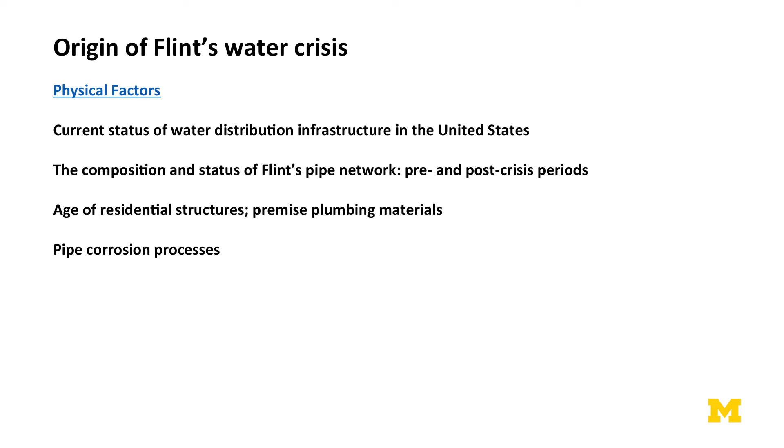Now, on what basis do these low grades get awarded? It has to do primarily with the age of the infrastructure, which is outmoded. Most of the pipes in this country were laid during the 1880s, 1920s, or the 1950s. Those laid in the 1920s, lifespan is up very soon.

Now, Flint is a city that grew rapidly between 1920 and 1950, reaching a population of twice what it is today in the mid-1950s, early 1960s. It's since gone down by half. I mean, we've gone from 196,000 people in Flint to only 102,000 today in less than 35 years.

The other thing that the American Society of Civil Engineers bases their grading scale on is what they call the funding gap. What needs to be funded versus what is actually funded in terms of addressing the problems. And this funding gap is getting bigger every year, where we need to address more and more infrastructure, but we're spending less and less on it. So that's a big problem.

Flint's pipes, like most of those in the northern states and the eastern United States, are made out of cast iron. They were laid in the 1920s. Some of them may have been joined with what are called bell and spigot joints, and bell and spigot joints were sometimes joined with poured lead. So there might be some lead still present in the main system. Those are the pipes that run under the streets.

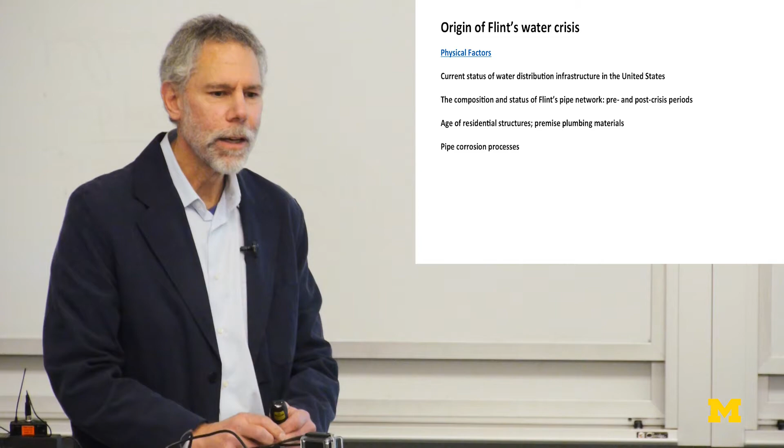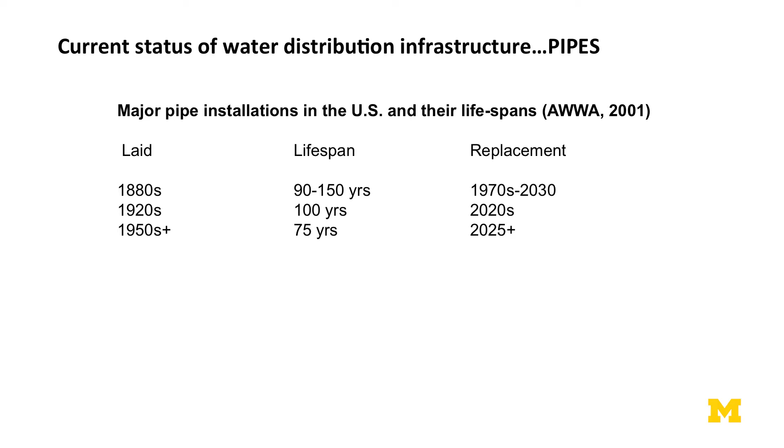So this shows the major periods of pipe installations in the United States, 1880s, 1920s, and 1950s. Another change occurred in 1970 when we switched from cast iron to ductile iron. Ductile iron has a little bit different arrangement of the graphite in the metal. It's more spheroidal, has a little better longevity. The cast iron pipes, the graphite component is a little more flaky. It's not quite as strong.

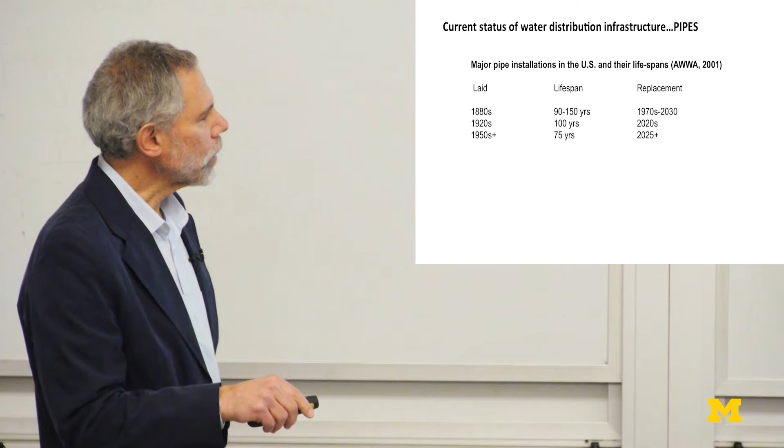But notice that the replacement period for the 1920s pipes is 2020, essentially. And that's why we're starting to see widespread main breaks in Flint. Just last Tuesday, we had a major main break that took out the whole north side of the city. And we had a boil water alert. That can cause big problems because you have to shut the water off, and then stagnant water in the pipes can leach more lead and also becomes conduits for inflows of bacteria.

This chart just shows what's in Flint. We have 600 miles of main pipes that are primarily cast iron. Some of the older pipes built in the 1890s were actually made out of wood, and a few of those are actually still in there. Where, we don't know. But a lot of older cities have wood as conduits for water. 80 years old is about the average age of the mains.

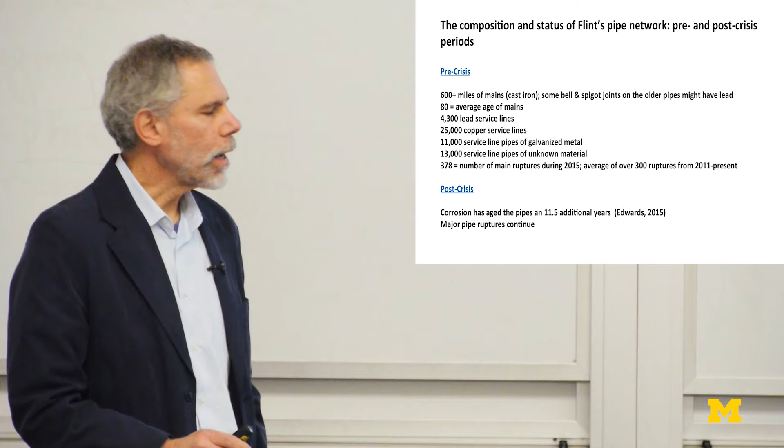We have 25,000 copper service lines, 11,000 of galvanized, and then we have 13,000 of unknown. And that was missing data. And that's a result of those cards not having adequate information that got transferred to the parcel maps. We had 378 main ruptures during 2015 and an average of over 300 from 2011 to the present. Right now we're looking into the spatial correlation between main ruptures and the outbreak of Legionella that occurred in the city, in the county, that has killed 10 people over the last year and a half.

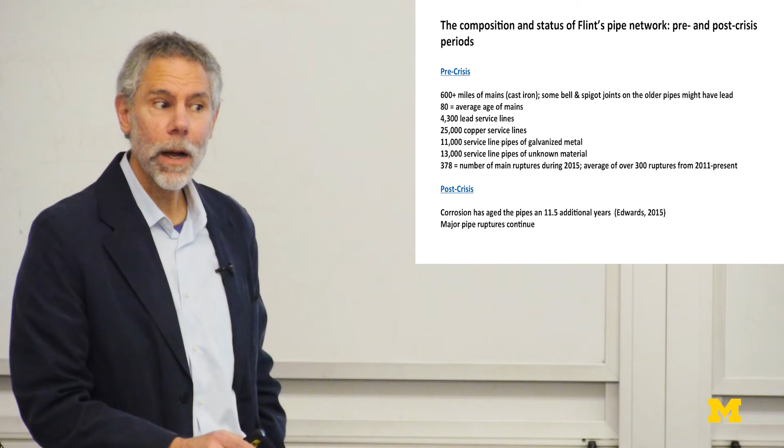Professor Marc Edwards of Virginia Tech did a simulation in the laboratory, and he looked at how much aging had occurred as a result of the aggressive water that Flint had used for 19 months when it switched off of the Detroit water system and began drawing water from the Flint River. And he estimated that the pipes aged an additional 11 and a half years. This is already a pipe network that's on the edge of its useful lifespan. And major pipe ruptures are continuing.

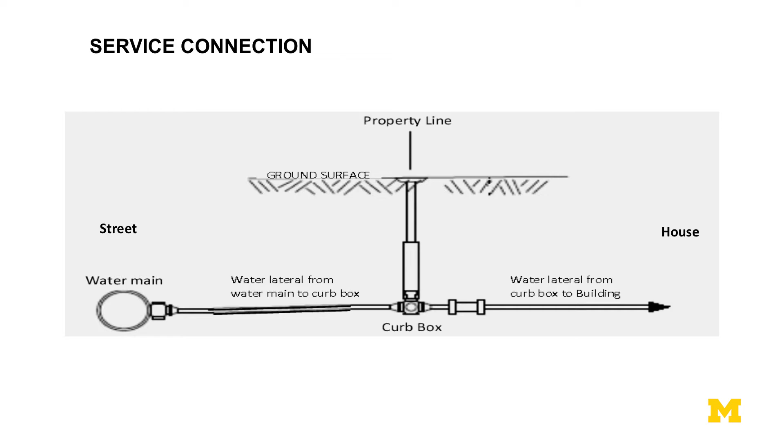So this is the service connection line I've been talking about. So you have the street here, here's your water main. It could be a 24-inch, 36-inch cast iron pipe. This right here is called the corporation valve. This goes right into the curb box. Here's your curb stop right here, where only the wrench from the utility can open that and close it. And then you have the service line leading into the house right there.

So quite often what would happen is this might be all lead, the city would replace this portion of the pipe. Homeowner could not afford to replace this portion, and then you'd have a copper to lead connection. And we had several thousand of those that we found in the data.

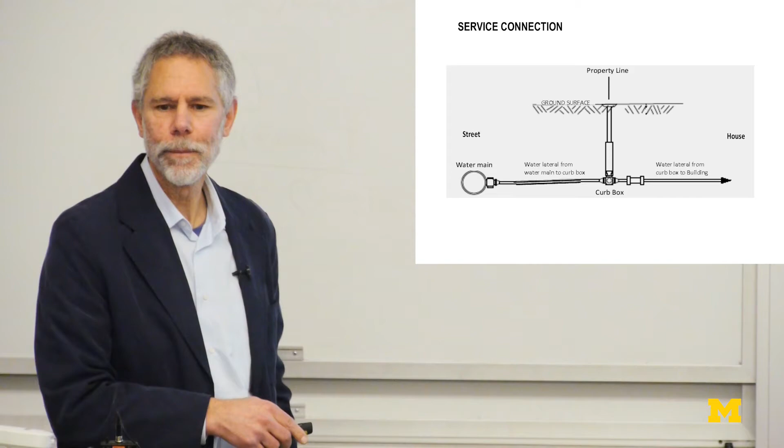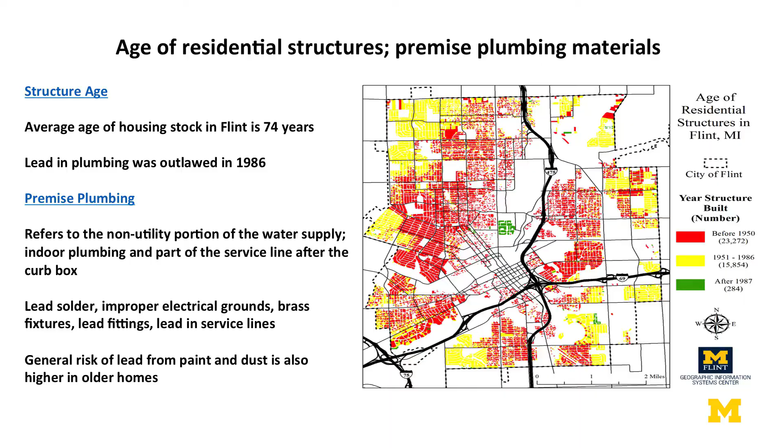Age is a big determinant of the potential for there being lead in a structure, not to mention other presence of lead within the paint, and even improper grounding of electrical devices to water lines can cause corrosion. I know I've been in people's homes where their electrical system has been grounded to their well. And that's not good, because wells also have lead components.

If your well was built before 1991, there's a good chance that your packer element, which is the element just above your water intake, could be made of lead. Michigan statute in 1991 outlawed the use of lead in well materials, but brass also has lead in it, up to 8%. So brass fixtures, faucets, fittings, that could have lead.

In 2011, NSF Rule 61 lowered the amount of lead which could be present in brass to 0.25% on a weighted average of all the fixtures in the house. But the law didn't go into effect until 2014. A lot of people have homes with brass fixtures that are older than 2011 or 2014.

So here's just a breakdown of what I've talked about already. Flint's average age of home is 74 years. These old homes are shown in red on the map here. And look at this concentric ring here that we have, with the older homes located near downtown and around it in a donut. And then on the outlying areas, you have the newer homes built between 1951 and 1986.

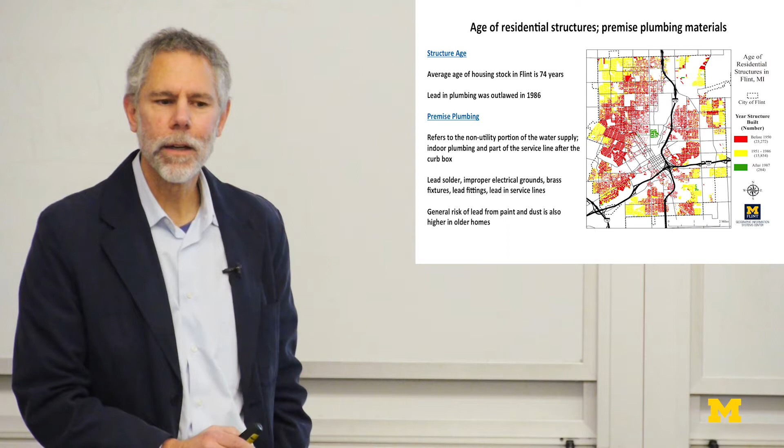And then only a few places in Flint, right here and right here, have new construction, relatively new, built after 1987. So it's quite possible that almost every home in Flint might have some type of lead component that water passes over before it reaches people for consumption.

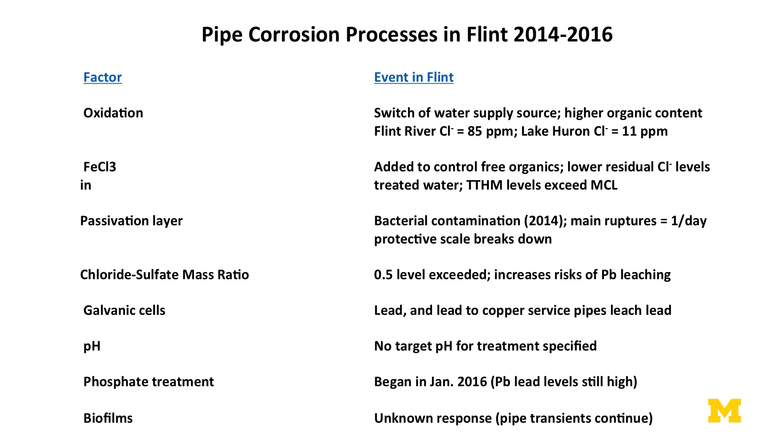So here's just a quick breakdown of what we think happened. When the water supply was switched, the water had a higher organic content. I know when I took water treatment here from Professor Glysson in the Civil Engineering Department, he mentioned that Ann Arbor used what was called a split treatment. They took water from Barton Pond, and then to cool it down, they used groundwater from the south side of the city near the airport, because treating water that's warm is problematic. So they needed to cool it off a little bit, and they got that through groundwater.

Groundwater is typically at about 55 degrees Fahrenheit, which is the average temperature of the earth. So it's a little cooler than river water. River water, though, has a lot of organic material in it. There's this crud that falls into river water. Pine needles, leaves, animal feces, you name it. You have to account for that in your treatment process. There's also a lot of salt that runs off into surface water bodies if they're inland, as opposed to the Great Lakes. So there's going to be high chloride contents.

So that water may be naturally more aggressive and create a lot more corrosive potential once it goes through the pipes. The Flint River had an average chloride content of 85 parts per million, whereas Lake Huron was much less at only 11 parts per million. So by switching over, not only did Flint take on a more aggressive water with chloride in it, it took on water that had more total organic carbon as a dissolved component. So then they added iron chloride to it, ferric chloride, to try to control those free organics. That lowered the residual chlorine levels.

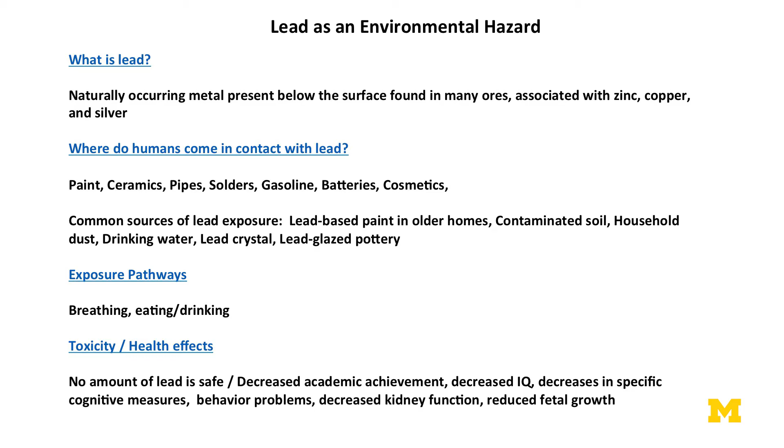So let's review what lead is. Lead's a metal, elemental. It's found below the surface. It's typically found in ores that are associated with zinc, copper, and silver. It's used in paints, ceramics. It used to be used in gasoline, batteries, cosmetics, solder until 1986.

Lead-based paint is one way we can get exposed to it. That's typically the way most children get exposed to lead. Contaminated soil, household dust. Several recent studies have come out which indicate that vacuum cleaners resuspend particles from the floor, and that can be a pathway of ingestion. You only can get lead 2 ways. You either eat it and drink it, or it goes through your respiratory system. Transdermal absorption is not a big factor with lead.

So no amount of lead is safe. The effects include decreased academic achievement, decreased IQ, cognitive problems, kidney function problems, reduced fetal growth.

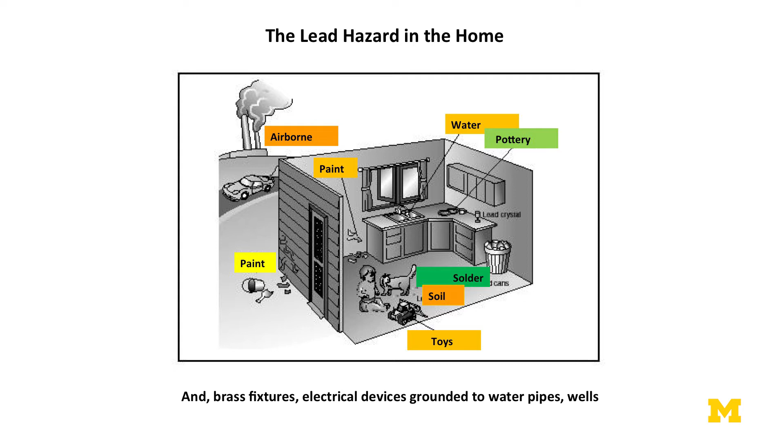So here's just a schematic of what some of the sources of lead are: paint, water, pottery, soil, toys. A lot of toys are painted with lead paint. And you know what children do with toys. Brass fixtures, electrical devices grounded to water pipes and wells also.

So let's talk a little bit about recovery. How do we get out of this mess? Well, classical risk assessment has essentially 3 steps to it. It's got a hazard identification stage, exposure assessment, and exposure response, or what in the health field sometimes is called dose response.

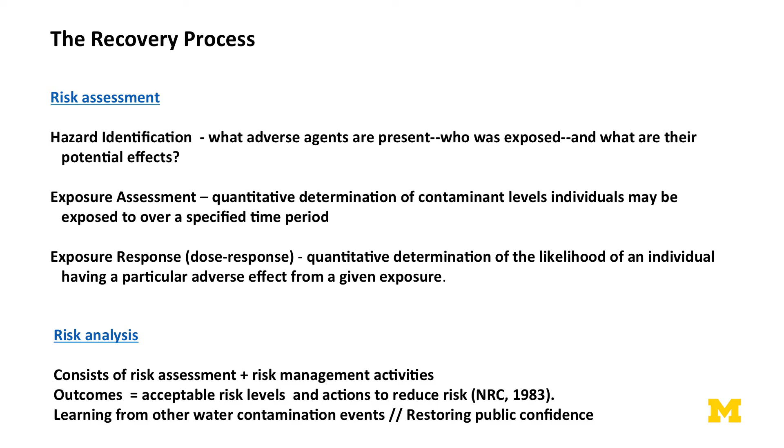Hazard identification consists of identifying what hazardous agents are present, who was exposed, and what are their potential effects. In Flint, we have not done that completely yet. What's lacking is a complete understanding of who was exposed, because Flint's population swells by 30 to 50,000 every day because we have incoming workers and incoming students. There's 4 universities in Flint: Baker, Mott, Kettering, and University of Michigan Flint. There's a lot of college students that come into Flint every day to go to school.

There's still 2 major auto plants in Flint. There's 2 major hospitals. There's a lot of people coming in on a daily basis. Those people for 19 months drank the water. So we may have to track them down too. Then we have to find out what level they were exposed. Our exposure assessment. That's going to be tough because lead's half-life in the blood is very short.

So what we do with children is we track them over time. A lot of social service agencies make sure that they get the early interventions, which involve good nutrition, particularly diets high in vitamin C and calcium and iron, which have been shown to have a good effect at least retarding the most nasty effects of lead poisoning in the brain. But you can't reverse the damage that's already been done.

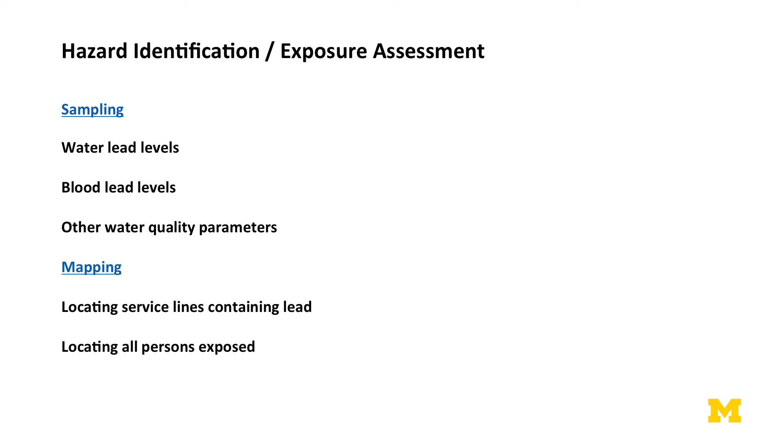And that's why I also went through the social factors. Because if we're going to recover, we're going to have to involve a lot of people in the process. And doing so has to account for those cultural, ethnic, and social characteristics of the community in order to make a recovery effective.

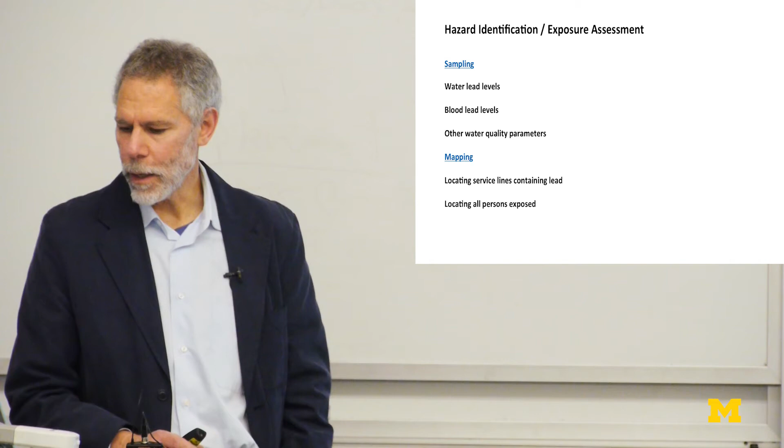So let's take a look at just stepping through the typical risk assessment procedure, what this might entail. Well, we certainly want to do a lot of testing, and that's been done. The EPA is doing what we call sequential testing. They take a water sample of 100 milliliters from what's called a first draw sample. Water has to sit for 6 hours, and then you draw it out fairly rapidly into 100 milliliters. You cap it, you send it to the lab, and then you do it again. And that represents a little bit farther down in the pipe system. So it allows you to characterize where in the pipe, that service line, some of the lead may be leaching from.

Especially where you've got a hybrid system, where they may have replaced some of the pipes and the service line leading into your house might be galvanized, but there's still lead out by the curb box, you have to sample enough to make sure that the water you draw doesn't necessarily represent what has touched the galvanized part, but what's coming from the lead portion of the pipe. So that's where this sequential sampling can capture some of the characteristics of the pipe replacements that have occurred.

We have blood lead levels. Every child is told to get a blood lead level test, but that doesn't happen, especially in poor communities. So we have huge gaps in terms of these data, but we do have some. And we need other water quality parameters. We need microbiology in order to understand what's happening with the biofilms.

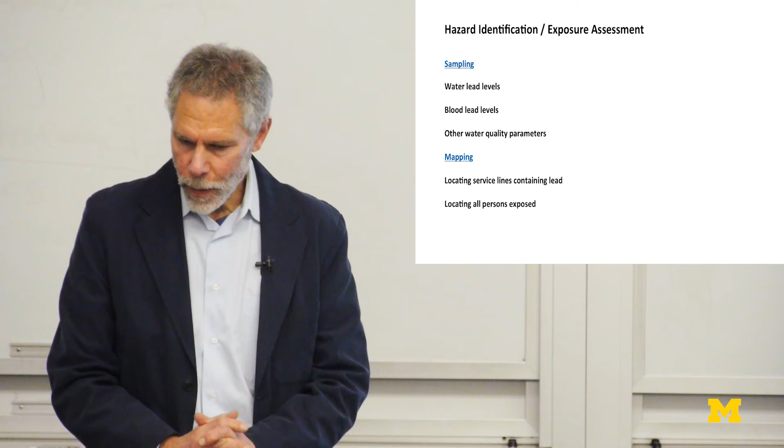When the problem happened in Milwaukee, Wisconsin, what they did to help regain people's confidence was... Cryptosporidium is a protozoan. And what's particularly nasty about cryptosporidium is that it forms an oocyst when it leaves the host body. An oocyst is a hard protective covering, so it can live outside the host for several months. And then when it's taken up by another host, it goes into the small intestine and starts causing all kinds of gastrointestinal problems. So people who are immune compromised have a lot of problems with it.

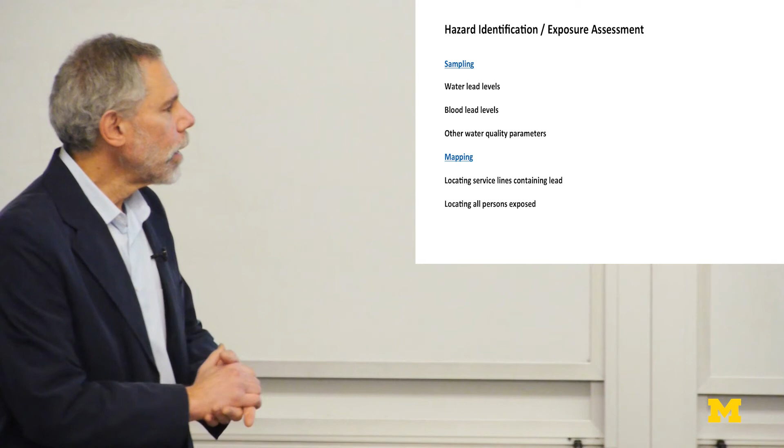And if you have AIDS or rheumatoid arthritis or some type of immune disease, it can kill you. And it doesn't really respond well to antibiotics either. And it can come from feedlot runoff, from cattle, from beavers. Any kind of wild animal or domesticated animal can produce literally millions of cysts in their stool. So that can get into the water. If that gets into the water supply, you've got huge problems. And it did in Milwaukee in 1993. 400,000 people, as I mentioned before, got sick.

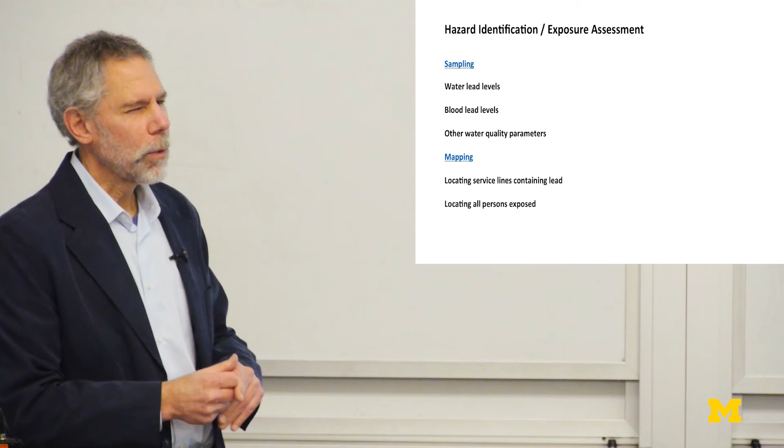How do they regain confidence in their water supply after that event? Well, they went to the intake. They started at the lake. Milwaukee's on Lake Michigan. And they took samples of the water they were getting at the intake, and they took samples further out, and they found out that the water quality was better further out, so they moved the intake. And they let everybody know they did that. Then they went into the treatment plant, and they said, well, you know what, this cryptosporidium is 5 to 6 microns in size. We're going to put filtration in of 1 micron. We're going to make sure that we filter this thing out.

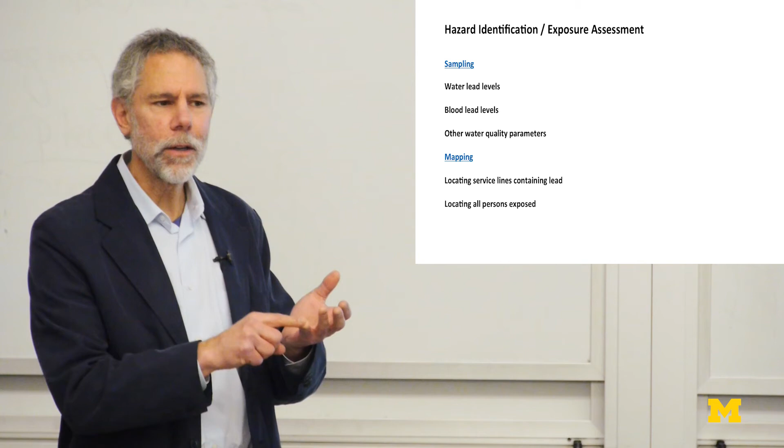They didn't stop there, though. I think that probably would have handled the problem. But what they needed to do was to overcompensate because people had lost confidence. So the Safe Drinking Water Act requires that you test for 91 different contaminants. The city of Milwaukee started testing for more. They started testing for trace pharmaceuticals and other microbiological agents. That gave people confidence that the public utility now was going to be on top of the problem should any new challenges pose themselves to their water system. Now, it took some time. It didn't happen overnight, but eventually they regained confidence.

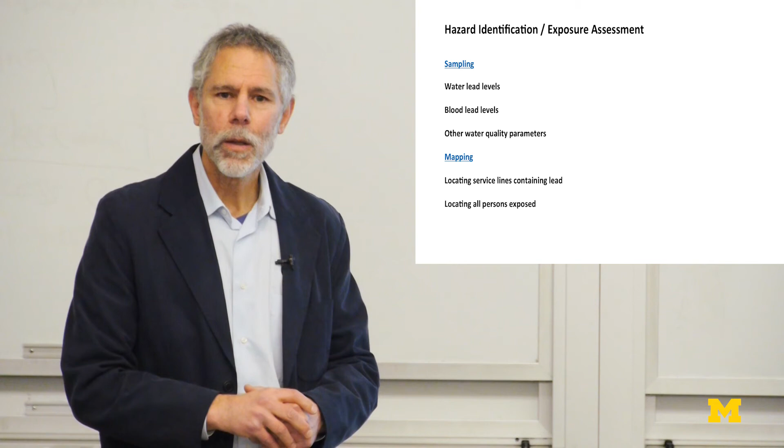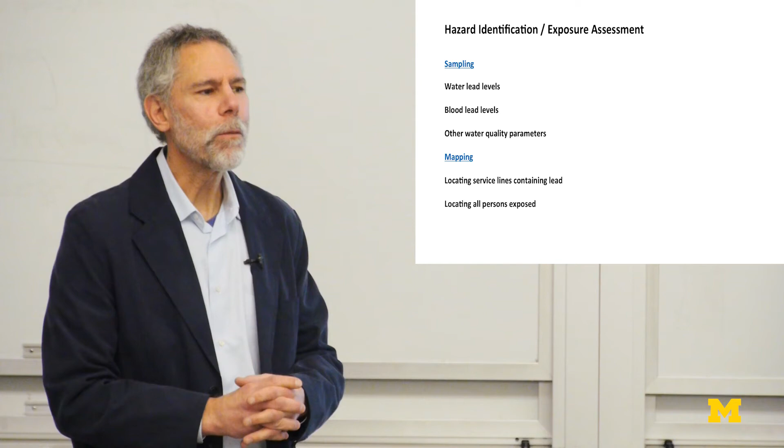Now, we have to locate where the lead is. In Milwaukee, the perception was that the water intake was bad. The perception in Flint is that it's the lead. And if you talk to any Flint resident who has an older home, they want lead removed from the plumbing system completely. So we have to locate all people exposed too, to get a full accounting of what happened.

Now, the lead and copper rule was made in 1991. It's essentially a recognition by the EPA. It's what we call administrative law. Cabinet-level agencies of the U.S. government can make their own law. It's called administrative law. They publish rules, and then it becomes law as part of the Code of Federal Regulations. There's 4 different add-ons to the Safe Drinking Water Act amendments of 1986, and one of them is the lead and copper rule. It mandates that public utilities, depending upon their size, have to proactively sample every 6 months a certain number of their customers' water at the tap with a first draw sample to look for lead and copper.

And the intent of the law is that you should do it in places where you expect there's a high risk of lead, because you really want to find this stuff. Now it's starting to come out more and more that a lot of water utilities are dodging this responsibility by looking in areas that may not be such high risk, so they come back with negative tests on their lead.

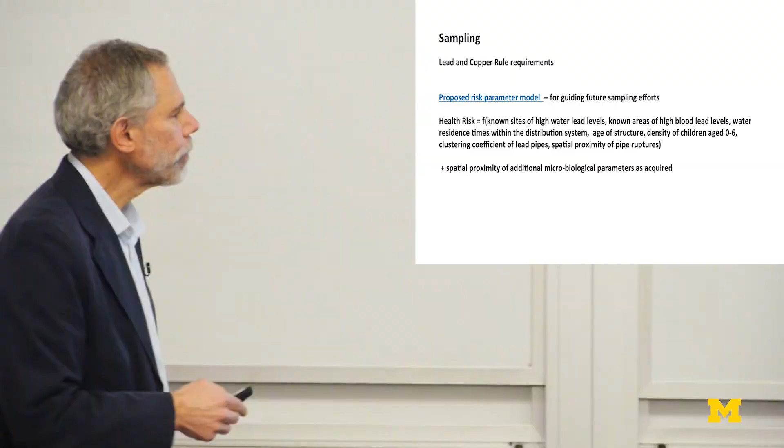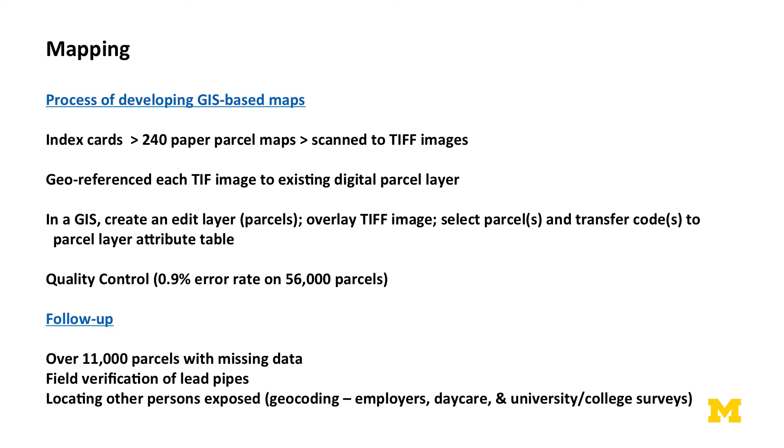So here's how we developed the maps. We started with the index cards. We looked at them and we just jumped back about 3 feet and we said, we're not touching those. What else do you have? And luckily they had put the code of the type of service connection into the house on parcel maps, and they'd scanned those to tagged image files. We georeferenced each TIFF image to an existing parcel layer. So that was a process of 4 corners of 240 different segments of different areas. That took us about a day and a half.

And then we created an edit layer of parcels and we overlaid the TIFF image on it, and we selected the parcels and transferred the code to an attribute table within the active editing layer of the GIS. An image doesn't give you any manipulative ability on the computer. You can just display it, but you can't select it. When you put it into a database, you can do cluster analysis on it. You can do spatial statistics on it. You can do other things with it.

So we finished this for 56,000 parcels, and we had a quality control of less than 1% error rate on 56,000 parcels, which we thought was pretty good. It's probably lower now because we went through and corrected those errors we found. But we still have 11,000 missing parcels. We're going to have to follow up with those.

Anyone who works in Geographic Information Systems knows that the computer doesn't give you the answer, it just gives you the roadmap. So you have to go out into the field and verify what the computer's telling you on the map. So we're going to have to get into people's homes. This offers a unique opportunity to start addressing the premise plumbing and the other sources of lead within the house. So earlier I mentioned that Flint could become a model nationwide for lead abatement and getting rid of this toxin in the environment.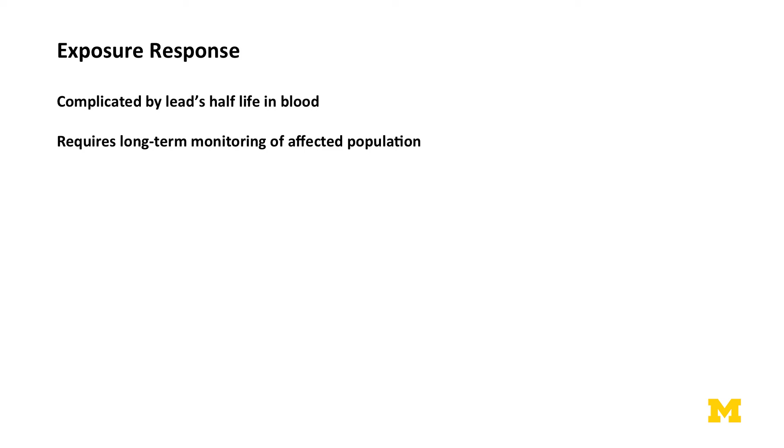So the last part of the three basic parts of a risk assessment involves exposure response, and that is going to be complicated by lead's half-life in the blood, because we really won't be able to tell necessarily who has been exposed through blood testing. It just won't show up. So it's going to require long-term monitoring of the population, particularly children. That's where a lot of the cost comes in.

I talked about cryptosporidium in Milwaukee. The public lost confidence. The utility moved the water intake. They upgraded filtration. They tested for more than 91 contaminants, and they reported all the results. So there's some good lessons here for Flint on moving forward on how they can regain public confidence in their water supply.

So we need to activate our available scientific and community resources. Right now they've retained Professor Edwards from Virginia Tech to oversee some of the sampling, and they've got Dr. Hanna-Attisha on an advisory panel, but nobody else. We've got Kettering University and our university. We have a lot of engineers. We have a lot of expertise in water resources in general.

We have a lot of people with community work in their past and in their present, and we need to activate those resources. We need to collect data in a culturally sensitive way. We need to inform, educate, and make sure people trust what's being done. That's a huge, huge issue. We have to remove the actual threat. People perceive that to be the lead in the pipes.

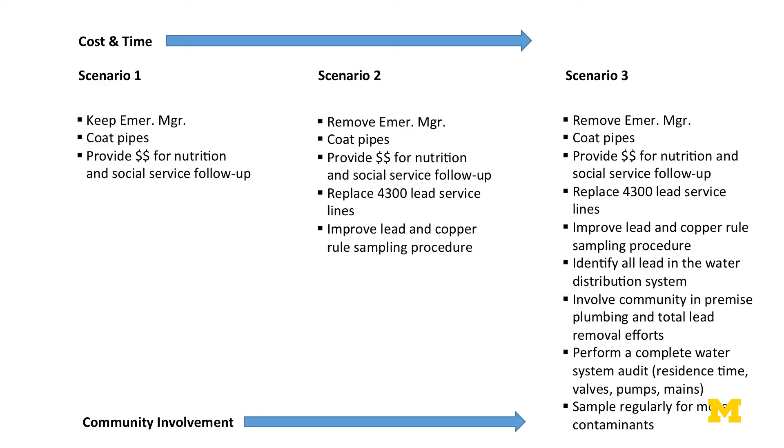Another scenario would go a bit further: remove the emergency manager, coat the pipes, provide the money, so again, this is just what was in the first one, and then add replacing all the service pipes and then improve the lead and copper rule sampling procedure. Right now, we allow 10% of the samples to skate by if they're over the level. It's the 90th percentile, that's the key value. Do you want to be one of the 10% who has high lead levels in your home? I mean, if any level of lead is deemed a threat to your health, why don't we have that as part of the rule?

And then scenario 3 contains everything from the first 2, and then it identifies all the lead in the water distribution system, involves community in premise plumbing and total lead removal efforts, performs a complete water system audit, looking at where the residence time problems are, valves, pumps, mains, all the infrastructure, and then samples regularly for more contaminants. Okay, so again, this is modeled on the Milwaukee response.